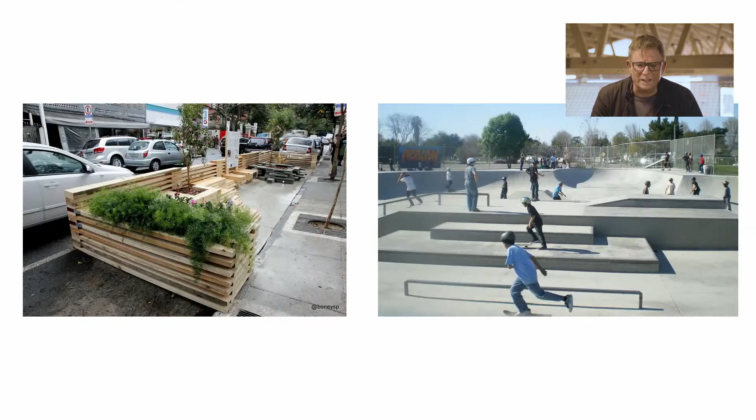Movements such as these, that in many ways can be considered a form of social activism, have ironically inspired many contemporary planned public spaces, such as skate parks and parklets. As you can see in the images, small interventions in the city are really critical to bring life. In a sense, I'm convinced this has been inspired by the more guerrilla efforts that people have in terms of doing it on their own. Cities embrace that and they bring solutions to the table as well.

Likewise, I'm also intrigued by some of the more top-down cultural institutional strategies when done well - spaces designed by artists that often blur that public-private divide. Here on the left is Chris Burden's Urban Light, a wonderful installation at LACMA. Frankly, it's the most important piece in that museum, but it's really for the people outside. And it's at the LA County Museum of Art.

Jessica Stockholder's Color Jam on the right is located in Chicago, where the artist quite literally created a 3D painting at a major city intersection. I'm inspired by artists, inspired by how they engage cities. So to me, that is part of the DNA of what we try to do, inspired by the people who are also embracing this idea of cultural evolution within cities. Chris and Jessica are doing that, and that's something that drives our work.

In our work, we likewise bring aspects of the public realm into our projects. This idea of borrowing space from the private domain is challenging, but we are committed to this principle, whether it be through small or large gestures. We believe that this brings value to the projects and benefits how people live.

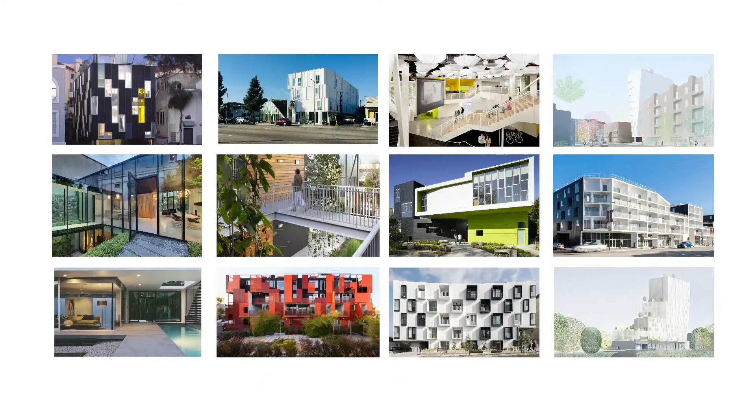All of our projects are designed with the same DNA and come in various scales, as you can see by these examples, from small to extra large projects. And they all house a diverse cross-section of people and places.

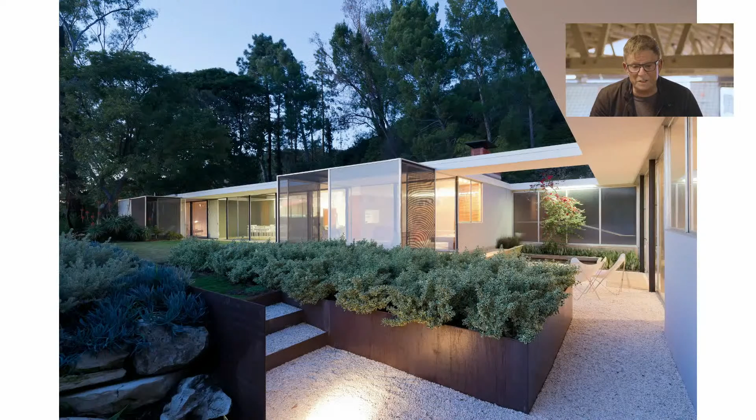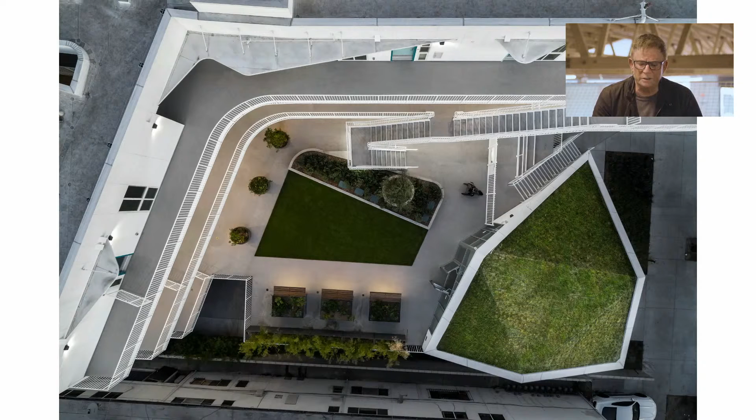Whether it be renovation of a historical architectural home, such as the Shulman house, which I will discuss shortly, or a housing project for the unhoused, which is our MLK 1101 project, or conceivably off-campus student housing along a busy commercial corridor, which is our Granville 1500 project, or a museum project, a small nonprofit project in Detroit, or conceivably a significant brand like Nike - each project is approached with the same core design principles in mind.

The first project I will discuss is our Shulman house renovation. This restoration and modernization effort applies contemporary measures of performance and design to a historical building to enhance its continued life as a family residence. That's critical to this project. This was not a museum artifact, it is a home. It was a home for Julius Shulman, and we were commissioned to design for a new family.

The Julius Shulman home and studio was originally commissioned by photographer Julius Shulman. It was designed by Raphael Soriano and completed in 1950. It's one of 12 built by Soriano, but only 2, I believe, remain. This is also the only one that's an all-steel frame, and it's a City of Los Angeles historical cultural monument.

So we were engaged to not simply restore the significant home, but to update the space so that it could meet the specific needs of a young family.

The home was inspired by the original case study houses, which were, in a sense, the testing ground for architectural ideas in Los Angeles in the 20th century. Soriano was not one of the case study architects, but he was inspired by it. He spent a number of years working with both Richard Neutra and Schindler, so his DNA was very consistent with what was going on here in Los Angeles during the time.

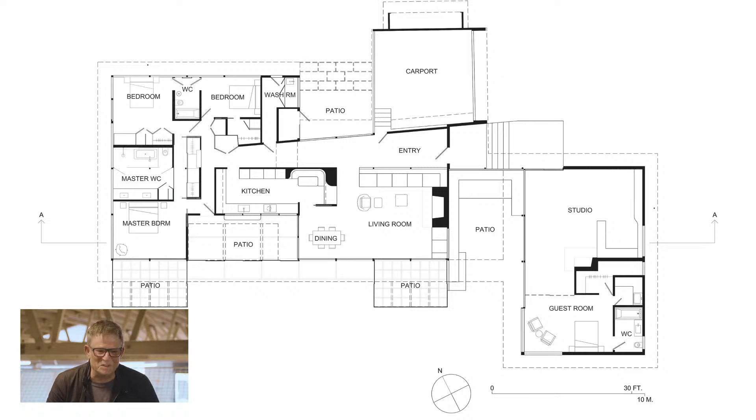Equally so in terms of how we wanted to handle the project. We wanted to recognize certain aspects we had to follow, but we were also able and open to the idea that we could upgrade the kitchens and bathrooms, which is appropriate for a family. That's what's interesting about projects here in Los Angeles - you have that opportunity if it's a home.

In this particular drawing, the darker green is what we had to protect and maintain - small components like the fireplace or other aspects. The lighter green is what we repaired or replaced in kind. The blue is what we were able to replace - you can see in the kitchen area, the middle area, we're able to replace that, which is important. And the yellowish green, we were able to alter. So a variety of different approaches throughout this whole design process.

Thus it had to be calibrated, and also working closely with the Office of Historical Resources, we had to do it right.

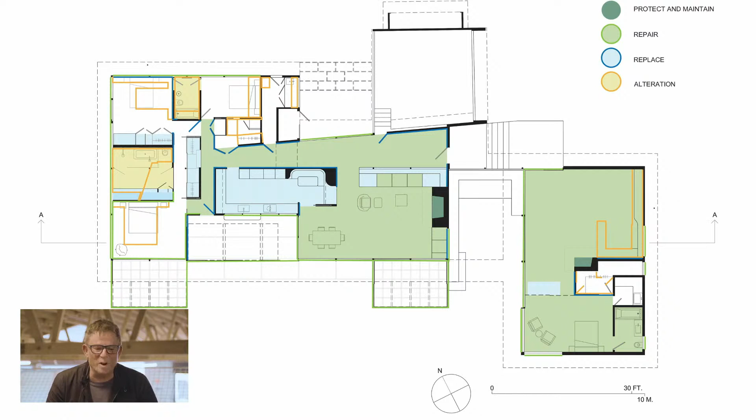One of the other key issues of the project was keeping with the indoor-outdoor California lifestyle popularly promoted in Julius Shulman's photographs, and that certainly was the case with this project. The original system of sequenced glass planes was restored and then paired with a parallel system of adjustable screening veils - that's something we brought to the table.

There was one issue with the house, which was that there was an ample amount of light that came in, but it was starting to fade the interiors and it was rather uncomfortable. So we added this layer to the whole project, which elevated the design, which I'm excited about. These transitional spaces created these screened-in patios.

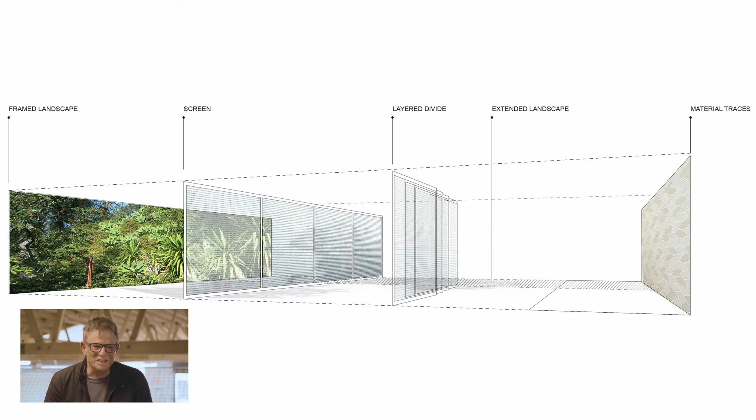And they were key to the project - we had to create comfortable spaces. So you'll see throughout the project, these screen ideas were infiltrated throughout the house to really play with the idea of muting the direct sunlight inside.

Here you can see the completed project, looking through the landscape. The landscape was done by Mia Lehrer, a local landscape architect here in Los Angeles. This is an idealized image. You can see the layers we were trying to create from the landscaping, filtering through these outdoor rooms, which were screened in, and carving out openings throughout the house. You can start to see the layers and components of the design, celebrating Soriano's solution.

Ultimately the owner, Shulman, won out, and the screens were put in so he could actually be outside. Needless to say, in Los Angeles—and certainly this may be the case in Australia too—there are mosquitoes and other varmints outside that try to infest your site. This was one way of mitigating that issue. A very interesting story behind the two of them, and Shulman won out in the end.

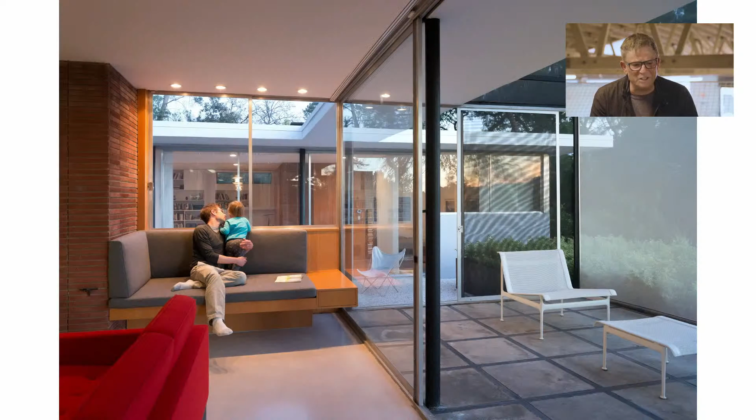Here you can see the palette of materials we were working with, including the existing fireplace. The cabinetry was a new component we brought to the table—custom cabinetry that we designed. The Office of Historic Resources was happy with that; they had no concerns. They wanted to make sure the project was a livable organism.

Here you can see Jonah, who's in the picture with his child. Beyond this image you can see his artist studio, a photography studio, and another detail of the living room. So in a sense, custom cabinetry was introduced to the project as new woodwork, and an integrated shelving system was also incorporated.

What was interesting was that there was existing structure and existing cabinetry, but we were able to reinterpret that for a more contemporary approach. That's fascinating to us, because I believe that's how one can handle these types of projects—you embrace the critical components and replace them in kind, but also have the opportunity to further the home into the 21st century.

Here's another view of the studio, very minimal. We did pour lightweight concrete to upgrade the space, and you can see beyond, the cabinetry where the books were, among other things. That was a space Shulman used, and now the new owner uses it as well.

Here you can certainly see the cork entry. Again, we replaced the cork in kind, a critical component, and we also incorporated a skylight because that area was somewhat dark. That skylight element, visible in the left-hand image, really brought a piece of architecture to the space that complemented it—it was a way of bringing in more light. A wonderful approach.

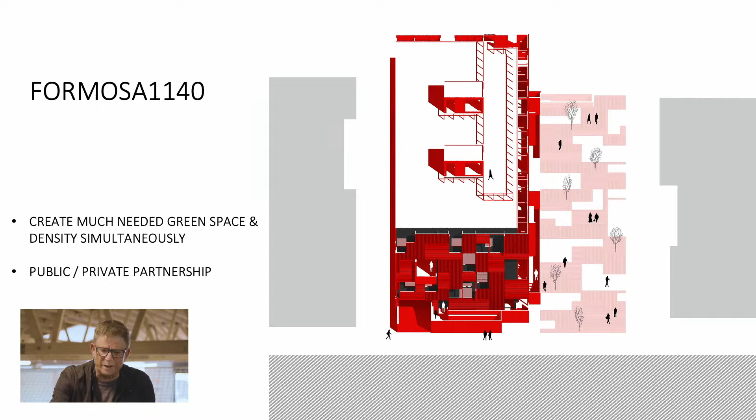Here's a couple of views of the existing site, where you can see that Formosa 1140 is located in the older part of West Hollywood, which was once filled with small craftsman homes and duplexes. The block has long since been transformed into a nearly unbroken wall of very generic 1970s stucco apartments. We wanted to really challenge that concept.

Our job was to design an 11-unit housing complex on the site of a derelict house. As you can see in this image, it was, in my opinion, a project that had no architectural significance. But during this particular time in West Hollywood, there was an enormous amount of development, and we got some pushback to try to save that house while still incorporating an 11-unit building on the site, which was fundamentally impossible.

So we took an alternative approach. As opposed to trying to keep the house, we wanted to go back to the city with an alternative strategy and see if they liked the idea. After months of back and forth between city officials, neighbors, our client, and our office, we proposed to demolish the house and replace it with 11-unit housing and a publicly accessible pocket park on the site.

What was very exciting is that the city liked the idea. This was one of the first pocket parks accessible to the public on private land. So this idea of blurred edges between the public domain and private domain is something that I think is essential to how cities could grow.

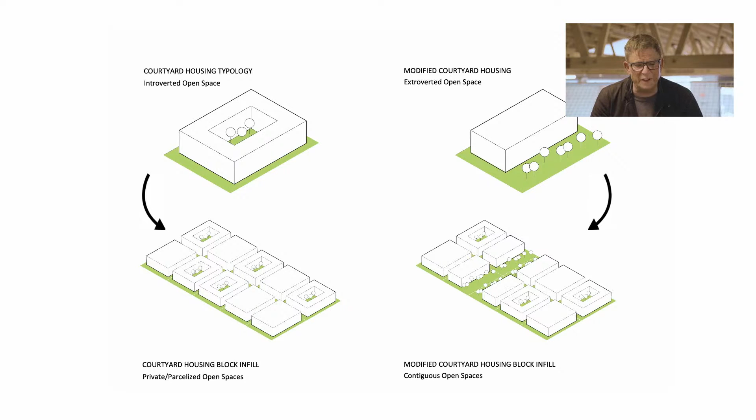This effectively bisected the parcel lengthwise, but provided a third, close to 4,600 square feet, for the residents, the neighbors, and the general public to share.

By eliminating this private courtyard, it also pushed the housing volume to the side, which allowed all the residential units to look out on the park, which is another wonderful component of it. As opposed to looking at an internalized courtyard, you can in effect be looking out at a pocket park. So your frontage is wonderful—a 45-foot by 100-foot space incorporated into this green space.

This is really critical, and this is the way we can make this unique public-private partnership work with cities. So can the city, in effect, lease the space from the client in perpetuity? That's what we did.

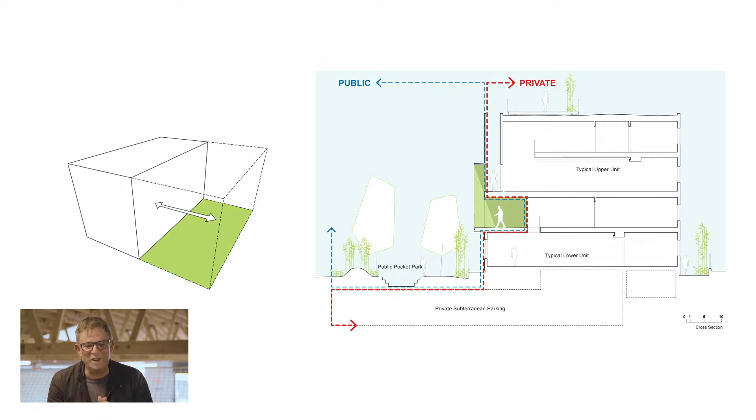It was a first for West Hollywood, meaning our client leased this private land to the city for $1 for 99 years. The city then paid for the park and will continue to upkeep it over the years.

A very interesting concept of architects working as strategists with cities and clients to create these opportunities for everybody. You can see in this drawing the section quality, with circulation on the third level.

You have the balconies at the second level, circulation on the third level accessing the units on top, and also accessing the first level from the park and the units below. So they're basically a series of townhouses, 11 total.

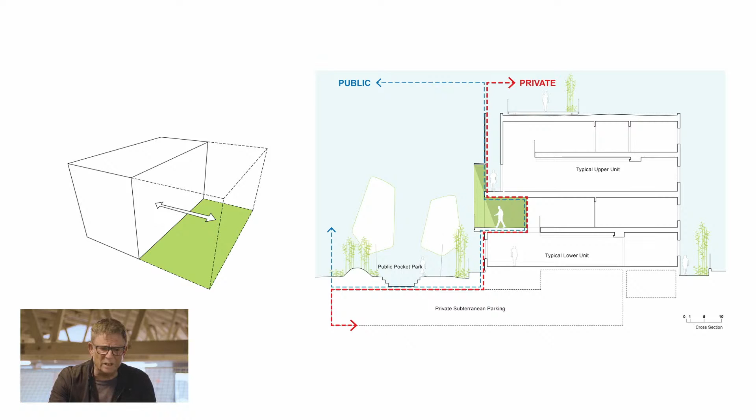There's a view of the project. The color and metal exterior created a strong contrast, as the neighborhood is dominated, as I mentioned, by these stucco boxes. This was an opportunity not only to look at aesthetics, but also at social agency.

I'm convinced that one has to do both. It's not simply enough to bring social agency to projects—you have to, as an architect, bring aesthetics, bring innovation, bring artistry to these projects.

So this design used a series of red and orange metal panels that not only provided shade to the units but also created apertures and openings for views. A very interesting way of choreographing a building.

The variety of privacy screens and balconies accomplished that. You have this wonderful experience inside where we're framing views, but we also placed perforated metal where we wanted to shade the units. This gives a very visual and visceral connection to the public park.

Coincidentally, the color of the Formosa Cafe, located down the street, inspired the strong palette for this project, which brings an interesting point about the idea of context. In Los Angeles, context is where you find it, so I chose to use color as context for this project.

Another side note: my dad, who was a film actor, frequented this Formosa Cafe with his colleagues Orson Welles, Marlon Brando, and John Houseman. In one sense, it was very close to my heart to design this project, literally a stone's throw from Formosa Cafe.

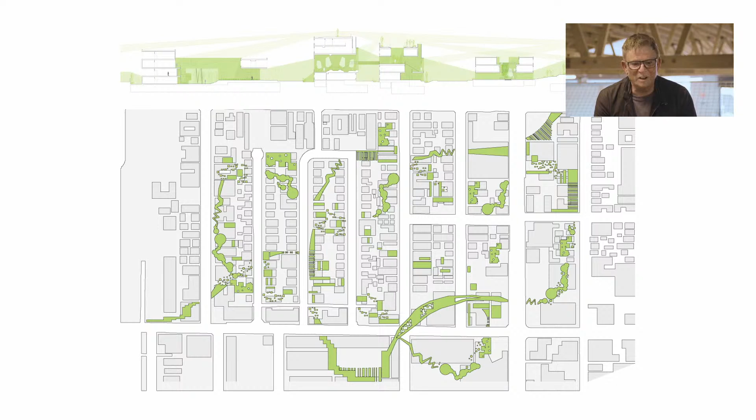So ultimately, we believe this is a model of finding opportunities where in a sense they did not exist in the past. It makes lively and engaging buildings into small parks. It all helps neighborhoods, that's the bottom line, and also brings people together.

Continuing this relationship between indoor and outdoor spaces, and in this case, challenging sites, I'm going to now discuss our SL 11024 project in Westwood. This project serves as a hinge building between two ecologies. It engages the UCLA campus as well as the larger Westwood community. Likewise, its design straddles two challenging environments: a historically sensitive building and demanding hillside topography.

So this project is fascinating in a sense. It's right across from the Neutra Strathmore Apartments, another historical landmark. Coincidentally, I got this project because I had done a previous project next to a Schindler project in West Hollywood, the Schindler House. So I landed this commission because they felt that there was a way that I, and collectively LOHA, could handle building next to historical landmarks.

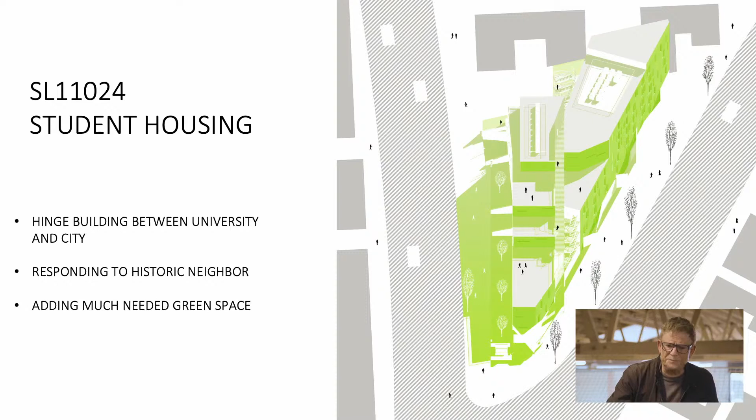So a critical issue here was that it was in Westwood, student housing, but also engaging the city. It's located in a very dense part of the city, Westwood, adjacent to UCLA, and right next to one of LA's historical treasures, another landmarked project by Richard Neutra called the Strathmore Apartments. There you can see the image of the project on the left, and you can see the Strathmore Apartments right next to it.

It may be difficult to see in the image on the left, but it's right next to the lower volume of our new building. Right at the north of that part of the building is where the Strathmore Apartments are. There's a site plan where you can begin to see our project, which is a very complex wedge-shaped site. It actually drops over 50 feet from one corner at Strathmore Apartments all the way down to Levering. There's a 50-foot drop, very complex and challenging site. And you can see the Strathmore Apartments shown in this site plan, across the street from it.

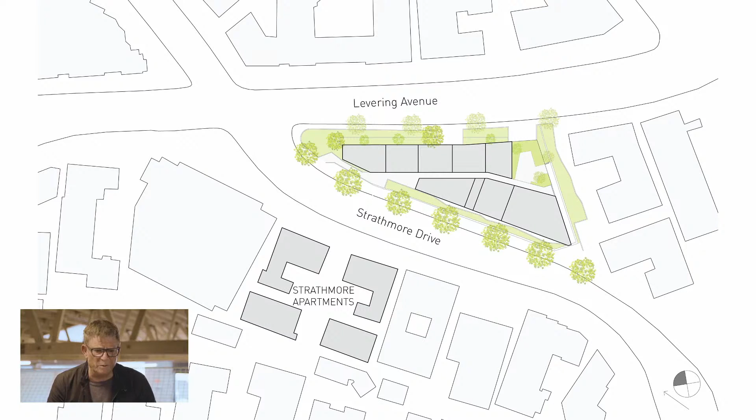So this was a very important project. Again, how to build next to a historical landmark played a big role. Our scheme did respond to all these constraints that were established by the neighborhood.

And you can see in these diagrams how do you deal with the complexity of a 50-foot drop in the site, and how do you deal with the complexity of the massing next to a historical landmark, which is only a 2-story structure. All these elements led to the stepped up massing, as you can see in these diagrams. So manipulating the building to respond accordingly, that was crucial.

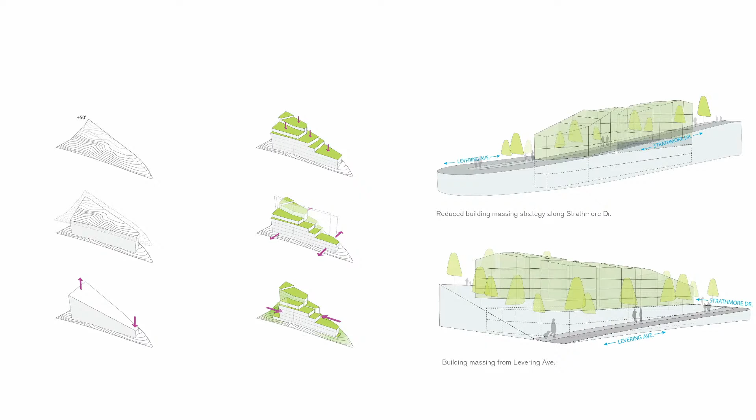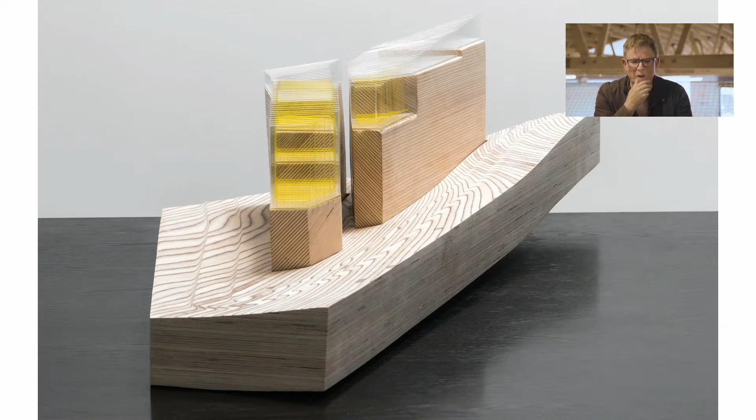We pushed the density of the building to where the larger buildings were. There's 6 to 7-story buildings on one end of the site, whereas the Strathmore Apartments was on the end where we dropped it to 2 stories. You can see this in these diagrams, and also in this model as well. The lower massing is connected to the Strathmore Apartments, whereas the density is pushed back where the larger buildings are.

And there's a view of the project completed. I'm really excited about this project. It was a very complex site, a very unique way of dealing with the city and how you stitch in these urban areas with these types of projects, but also push the artistry, push the aesthetics, while also recognizing the value of looking at how people engage each other.

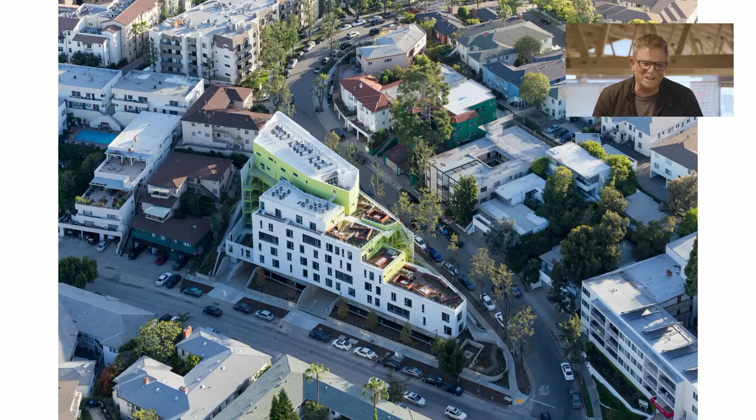That was critical. The stepped up massing afforded us the opportunity to have these outdoor spaces where people could conceivably connect with each other, whether it's students, or for that matter, there are a number of people in the building who are in the UCLA medical profession as well, doctors and nurses who live there. It's a very interesting hybridizing of two ecologies, the ecology of students and the ecology of just normal people who have jobs in the city. So hybridizing those two is very interesting.

And there's a view of the outdoor spaces. So again, this idea of outdoor spaces for residences throughout. There's vertical activated edges as well, because one can see down on the street. You can see from one level to the other how people can connect, and equally you can see the Strathmore Apartments in the distance, the white buildings. So there's a way of connecting not only in plan but also in section—that's critical to how you approach architecture. Think of it as being a living organism, how it connects not only in adjacencies but also in section.

And there's a detail of the facade. Our material choices for the building were, again, materials I'm very committed to—a metal exterior. This one was primarily aluminum because it was relatively close to the ocean, so to avoid rust we commissioned aluminum as an exterior material. That's what the white component is. All the cuts in the building, which return, you can see in the green colors—that was cement board. So it was a hybrid of two different materials. The perimeter was wrapped in white metal, and all the cuts were cement board, painted a chartreuse green, which is interesting because in the evening there's a light glow to it.

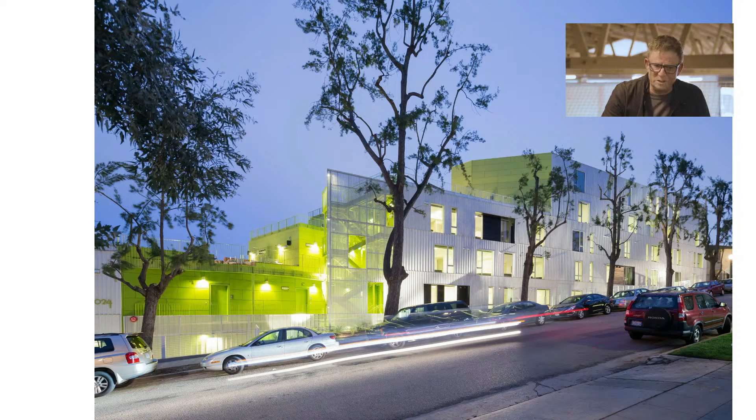So here you can see that image where you begin to see how the spaces inside have this wonderful kind of vibrancy to the cuts and the strategic voids throughout the buildings.

So now we're going to move away from Westwood to an area where there's a crippling reality of what we're dealing with in Los Angeles. There's an unprecedented housing crisis we all know about, and a massive inequity. There's a growing homeless population throughout the Southern California region, and we're dealing with it in Los Angeles. It's an everyday issue—when you drive around the city right now, you see it everywhere. We have to address this issue.

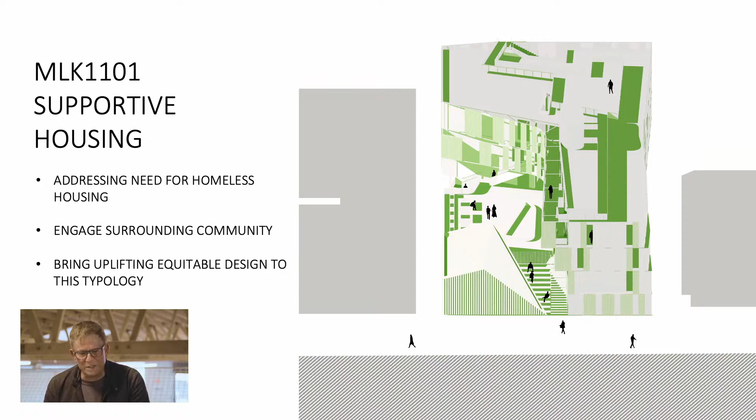Our practice is deeply embedded in this critical issue, trying to solve it. This project represents one effort to do that. It's a supportive housing project in South Los Angeles, where there's a need for critical housing. It addresses homelessness, engages the surrounding community, and brings equity in design to this typology. We are convinced that all good design has to be available to everybody—that's something that drives our work. We don't see a variation on that. We don't see supportive housing, or housing for the unhoused, as being less of a design commitment. We see design commitment on all levels, and this represents that.

Some background on the project: it's located in South Los Angeles, one of the city's poorest neighborhoods. 33% of its population has an income below the poverty line, and the college graduation rate is a meager 4%. This contrast is a lingering effect of redlining—the deliberate segregation of Black and other minorities, who were permitted to live but never to own property in homes they lived in. That's critical; they were never given that opportunity, and this represents a way of trying to challenge that. But even 50 years later, after those laws were made illegal, much of the racial and socioeconomic makeup of this area remains segregated. While individuals are no longer confined to communities based on race, racial boundaries still exist, defined by the disparity between the haves and have-nots.

That exists today—redlining exists today, but it's framed a different way, and that's something we're trying to tackle here. This phenomenon is hitting Los Angeles particularly hard. A growing homeless population, now close to 70,000 individuals, lives on the city streets. So at LOHA we feel a commitment to do work of consequence and contribute in the best way we can.

In 2014, we were approached by our client to design a 26-unit supportive housing complex on Martin Luther King Boulevard for formerly homeless veterans and chronically homeless families. The site was a vacant, unimproved lot right next to a McDonald's and a strip mall—a hodgepodge of low-rise apartment complexes on the street, but you can certainly see the wide streets and the dynamic of the space. It's wanting for something dynamic, wanting to provide pedestrian life, and that's what was lacking.

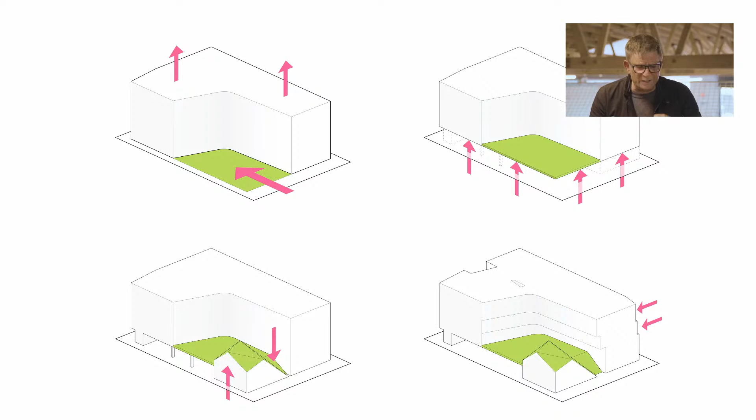So we lifted the building, thus you had this outdoor living room, which was above. We then folded it down to the street, so there was a visceral connection to the street, represented by the staircase that you'll see in these further images. There's the partie, or the axonometric of the project.

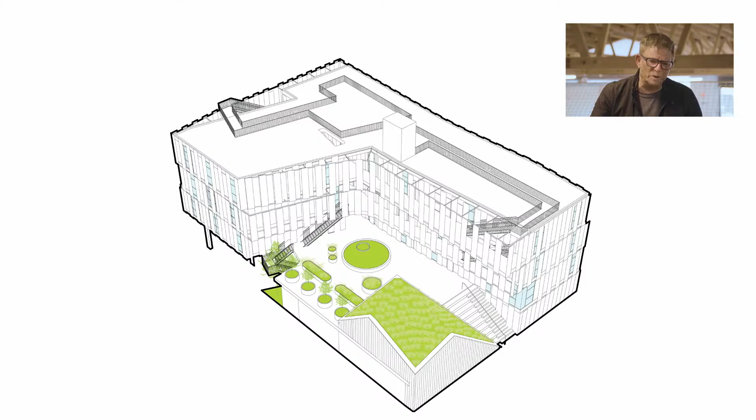An L-shaped building in terms of sustainable approach, which is very exciting. All the units are accessed from the exterior, so a very simple, very direct way of dealing with ecological issues. They can open the door, open a window on one side, open a window on the other, and you have cross ventilation. So it's a really nice quality of space and light, with light from a number of sources in these type of projects. That's something that drives a lot of our work. We want this opportunity to create passive design strategy with all our work.

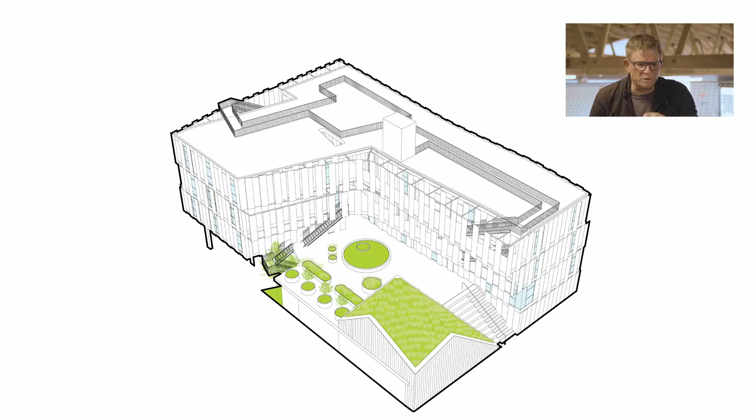So you can see the diagram, the L, the outdoor living room, and then the community room that we placed on the corner. That's critical as well. We do have retail on the street level, and there's a section you can see where, again, very important, each project we do has to have crucial sustainable approaches.

So each apartment is designed to receive sunlight and cross ventilation, reducing the need for heating, cooling, and artificial light. The project employs the latest strategies, environmental responses, forward-thinking green design to maximize space and benefit the entire community. The building was certified LEED Gold, which we're very excited about, and it features high efficiency heating and cooling, appliances and fixtures, solar water heating, electric vehicle charging, and bike parking. We're trying to encourage all these elements to be incorporated in the project, and that diagram starts to reflect all those components.

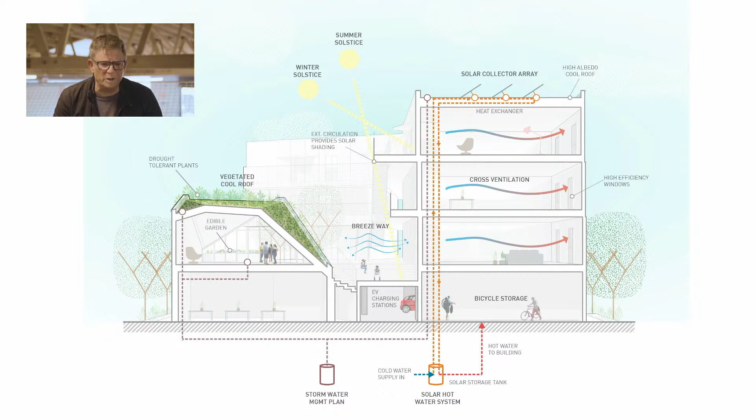We also, which is extremely important, have a green roof that folds down to the street, as you can see, over the community room. So bringing landscape is critical to this project and plays a big role. And there's a view from the street.

We pushed the density next to the McDonald's, which is not essential but helps respond accordingly to McDonald's. So the nature and the adjacencies of the buildings played a big role in terms of the overall design, responding to the context of where it is.

Again, these retail units are interesting because they will generate income to help subsidize the housing while providing workforce training. So these spaces are going to benefit not only the building, but also provide job training, which I think is critical to this, and it's also important for them so they can transition back into society.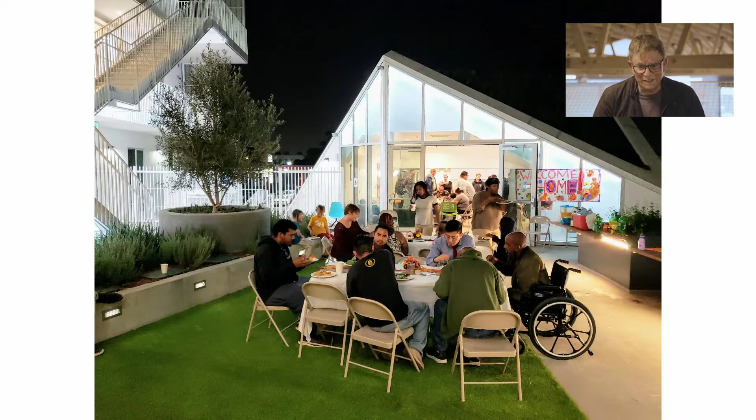And it goes to show you, you can actually bring great design to all socioeconomic levels. And this is a great image where this was literally when the tenants had just moved in, which was a Thanksgiving dinner. This happened before the pandemic, of course, but it was very exciting because they all moved in 3 days before Thanksgiving. So this Thanksgiving dinner happened right when they all moved into the building. It's very exciting to be there.

Again, furthering the need for homeless housing to be built faster and less expensive. This next project is celebrating that. It's called Isla Intersections and Annenberg Paseo.

As I inferred earlier, LA needs 568,000 new units. We have so many people on the street. We need to provide new units for affordable housing. That's one of the most critical things in Los Angeles, and we're going to need to provide that in the next coming decade. So with that in mind, the city needs to build homes quickly and inexpensively. That's critical to this project.

It's situated once again in South Los Angeles, in a very unusual site. It's actually several city-owned parcels made available for affordable housing developers. This is one of 1,700 properties that the city owns. And with regards to these very complex, challenging sites, the city is now bringing these to the table for nonprofit developers to provide affordable housing.

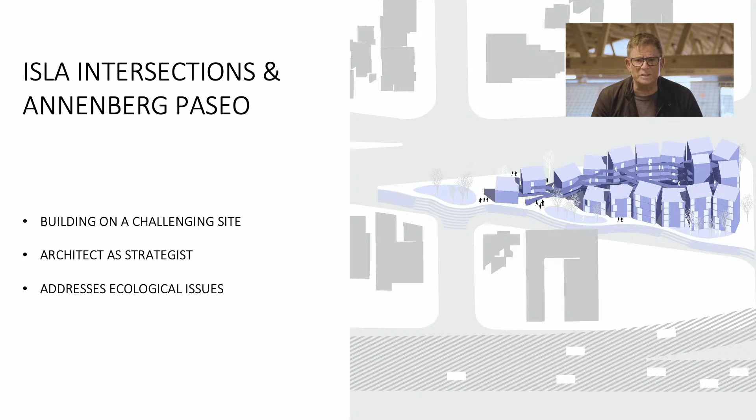Context image, and you can see the wedge-shaped, triangular-shaped site in the front there. Behind, you can see these very busy freeways. That is actually the busiest freeway interchange in the world - it's the 110 and 105 freeway.

And so you can see the challenge of these sites that the city owns. This is the last remnants of land that they have available in the city, and they're trying to find solutions in these challenging sites to provide spaces and places where people can live. But one needs to also tackle the issues of toxins and the issues of building next to the freeway. That's the challenge we had to address.

So with that in mind, we designed a 35,000 square foot building. It's a 54-unit housing project, and it's adjacent to the Paseo that we also designed, which is very exciting - that is a very important component as well. We provided a green lung to be able to mitigate the toxins and the noise from the freeways.

It did offer also the opportunity to work with container construction. So you can see on the left-hand side, these are the containers that were fabricated in a factory, while, as you can see on the right-hand side, we were doing the foundations on the site. This was really important because we shaved off one year from the total construction time on this whole project.

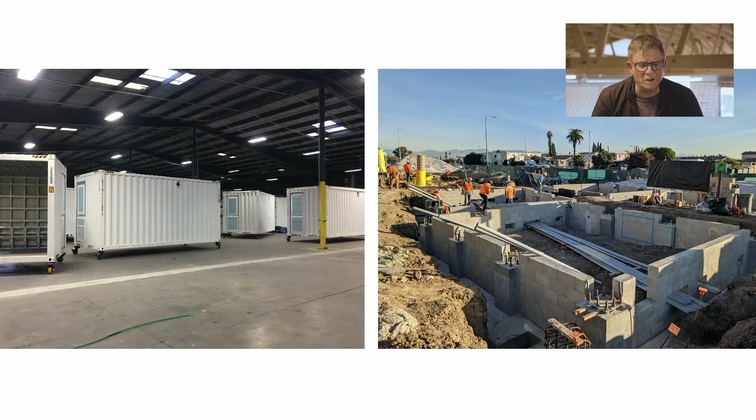Just to show you the timeline: from the time we started the project, once we got approvals and permits, we started working on the site utilities. At the same time, we were fabricating the units in a factory. As we know, the conventional way of building is you do all the site work, site utilities, foundations, and then build on top of it. What we were able to do is build all the units in a factory at the same time we were doing the site work, which saved us close to a year.

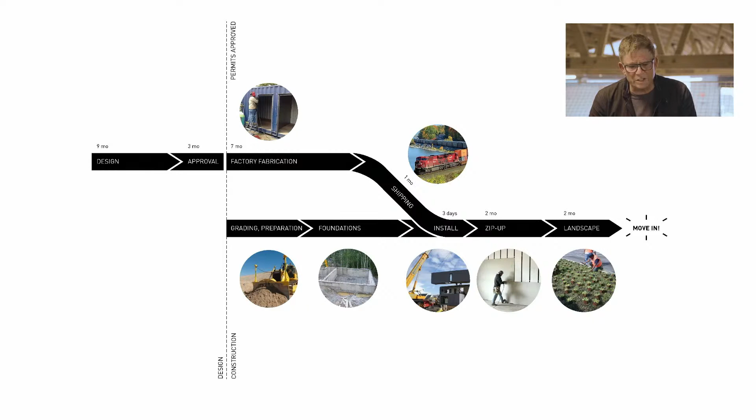And there's the site plan. It's organized along the spine of this street called Broadway, and it's a series of 16 staggered towers, for want of a better word. They go from 7 stories down to 2 stories. You can see in the plan that the uniqueness of the geometry played a big role as well.

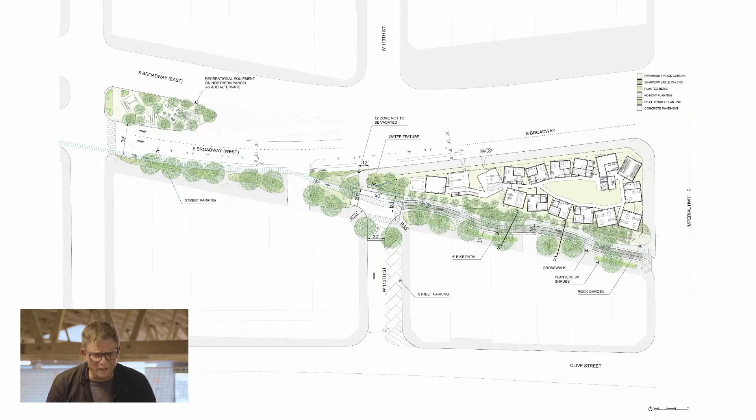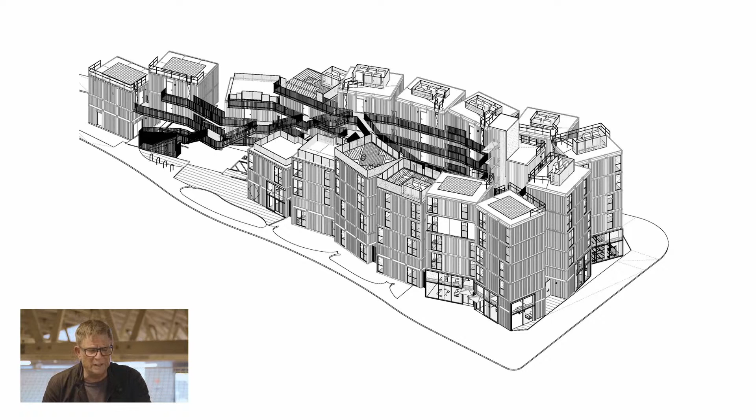And there's an axonometric, more of a diagram of the units. Greater density was critical—we had to provide as many units as possible. They're all stacked around this very unique wedge-shaped site, but connected by a series of walkways in the middle areas. So circulation in the center, and all the units wrapping around the perimeter.

One of the key ideas of the project was we didn't want to create a flat, simple geometry. By shifting the geometries of each of the quote-unquote towers, the sound and nature of noise from the freeway is mitigated somewhat by the geometry. You don't want a flat surface, so we calibrated this with consultants to find the most optimum way of designing the project to address that issue.

Here's an axonometric of the project, and next to it, which is exciting, you can see the Paseo. We actually vacated this one street called Athens Way and made it more pedestrian friendly and bike friendly. This is one of the first shared streets in Los Angeles.

As you know, there's a car culture in this city, and the crucial thing to this project is that we wanted to mitigate that, to address it, to challenge it, and provide spaces for people to walk and ride bikes. That's essential to the city right now, and it's going in the right direction. This approach to the city is being embraced by a number of people, and certainly the city is opening up this opportunity.

Shared streets get away from cars and provide gardens and a variety of programs. This particular Paseo that we're designing, along with the housing, provides for a farmers market. There's a small lab for startup testing, the making and selling of goods, programs to promote healthy eating, fitness, and job training. So all the programming of the adjacent housing on the first level is job training and amenities, which are critical to getting the unhoused open to moving to the next step in engaging society.

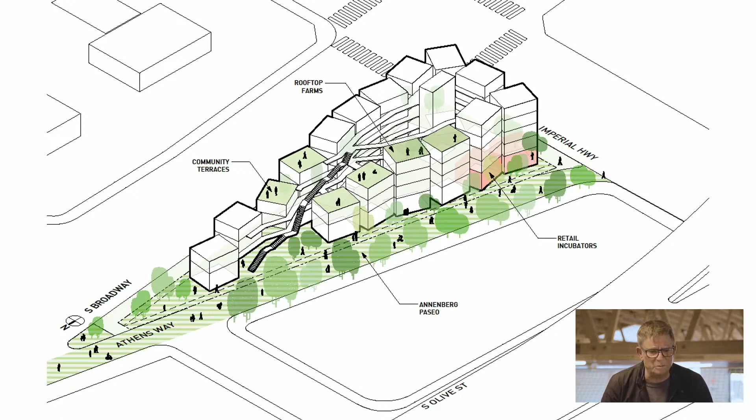And there's a view of the project, and again the context of this carpet of development—low, but very dense. It's interesting, this whole project.

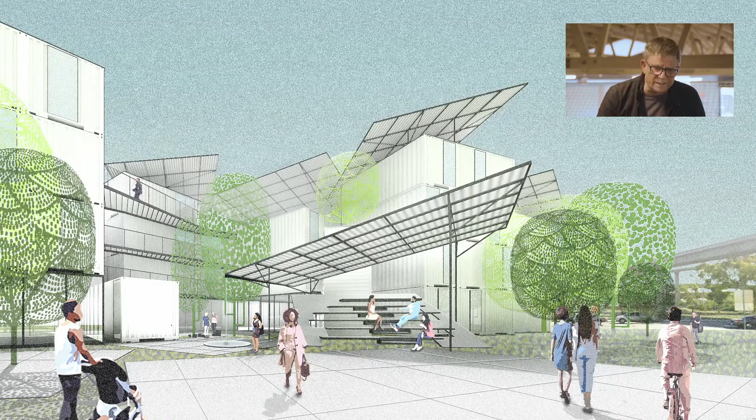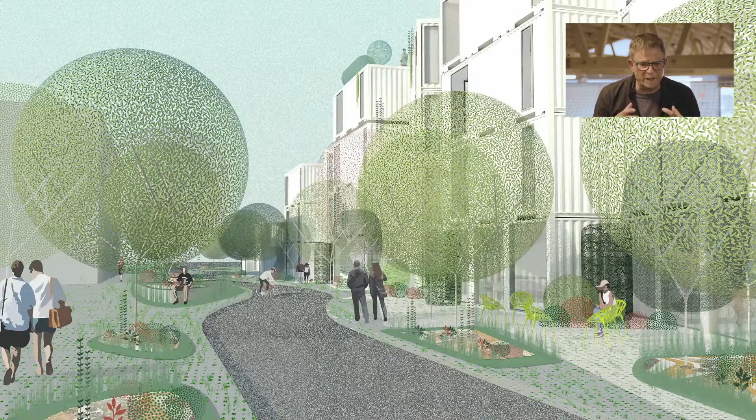We've also been asked how we feel about providing housing next to a freeway. Well, frankly, these sites are the last remnants available within the city, so we see this as a case study for how we can do this—that's critical to the solution. Not only are we creating this green lung to mitigate and absorb toxins from the freeway through the Athens Way shared street, we're also providing multiple sustainable solutions, including solar power and water capture devices such as gray water systems. We're trying to bring all these aspects to the project so it is a living organism, one that embraces a good place to live.

And here you can see the Paseo that we're designing. That was once a street, but now it's going to be much more democratic towards pedestrians and bikes. This will, in fact, have a Greenway with a marketplace.

And that's critical. The other issue is these trees that are just conceptually drawn here. We are going to be planting, working with consultants, the right trees that absorb site-specific pollutants, trees and bushes that have the ability to clean the air. So that's very critical to this. You have to pick the right landscaping to accomplish this.

So the shrubs and the vines and the trees are all very specific to this site to absorb the toxins from the freeways. It also becomes part of a larger network of urban farms in the area, and the mission we're trying to achieve is preserving the tradition of South Los Angeles, which is bringing more produce to what many consider a food desert. There's very few opportunities for healthy food in this area. So we see this as a great opportunity to do that.

So the Paseo brings equity to people, bike riders, and car culture at the same time. And that's an important step for Los Angeles.

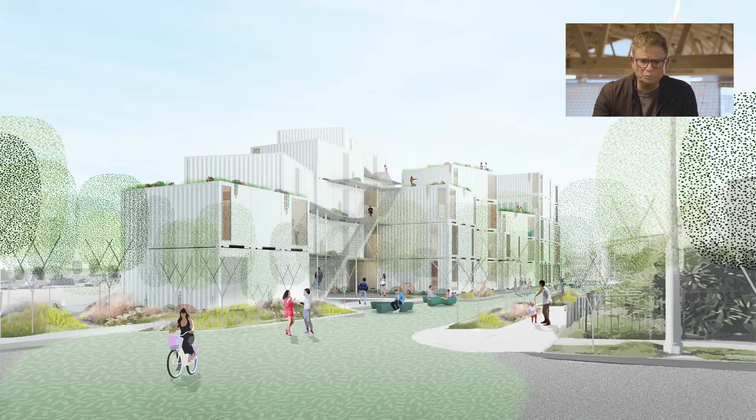Just another view of the project of the Paseo. You can see on the street level in this rendering, we will have a number of storefront spaces, and they will be training and support services and administrative offices, engaging the ground plane.

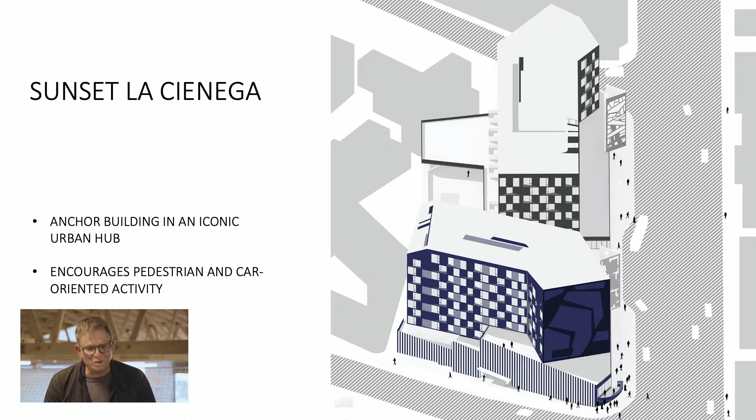Another project we've done, which is a jump in scale, is in Sunset La Cienega. It's a project that engages one of the most robust neighborhoods in Los Angeles, Sunset Boulevard. It's a very important, prominent intersection in the LA region, Sunset Strip at La Cienega, so it's the heart of the iconic Sunset Strip. What we're trying to do is create a vibrant new hub of urban activity in this area, which right now does not have that.

A little of the history here: the project is located at the corner of Sunset and La Cienega. It's a winding hill-type road synonymous with cruising, for want of a better word. The strip is lined with giant billboards, bars, restaurants, and iconic music clubs, such as Whisky a Go Go and the Viper Room. So you can see the energy that exists.

So we wanted to build on that and embrace it. Primarily, the design is to create view corridors through it, strategic cuts in the building, so that as opposed to a very conventional building, we've created this view corridor through the building so you can see the city beyond. And that was very important.

So these are early studies that we're looking at. It was designed as a public plaza with buildings that bisect the two buildings. And there's the building itself.

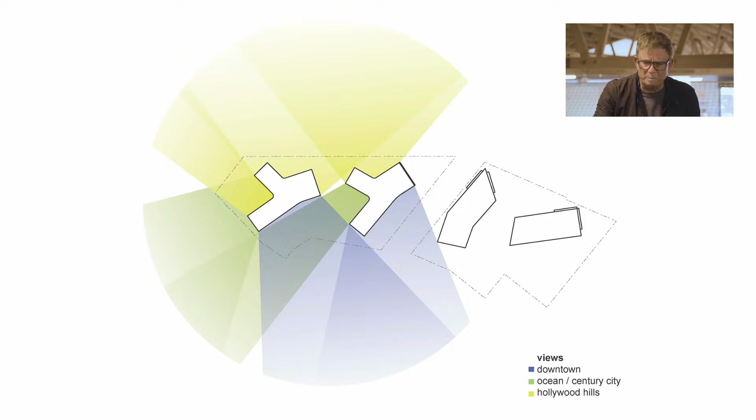But the patterning of this building played a very important role in choreographing the building. The facade of the two towers are finished in solid patterns of smooth trowel plaster, one steel blue and the other gunpowder gray. Two different buildings, but very simple, very direct, very principled buildings. And that was our approach.

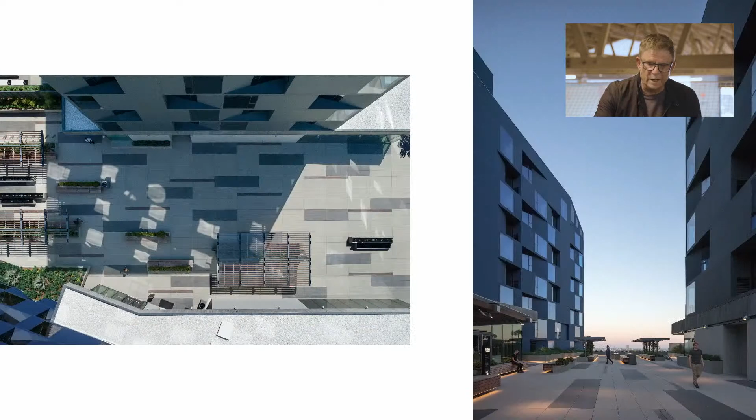Here's two other images of the completed project. You can see on the right-hand side the view corridor I was referring to, accessible to the public between the two buildings. You can also see the dynamic patterning of the windows.

Interestingly, not only was the pattern of the building reflected, it was also incorporated or folded into the landscape strategy as well. So the windows are, in a sense, a waffle pattern, a kind of shifted patterning in the building, which played a big role, in my opinion. We also folded back the windows 48 inches, so you have this very strong kind of patterning or choreographed spaces on the building.

So there's an example of it right there, where you begin to see how the building's facade can elevate the quality that one normally sees. What's also interesting is that we had to provide mechanical units per unit, but by folding back the actual windows, it provided an opportunity to put the unit hidden away. And that's something you can't see in this building right now — you actually don't see the units because they're tucked in where that fold is.

You can see the patterning and the quality of the design, which elevated the overall solution. This is a total of 190 units in the building, and there's a quality that image shows the context of the building on La Cienega. And a view of the lobby.

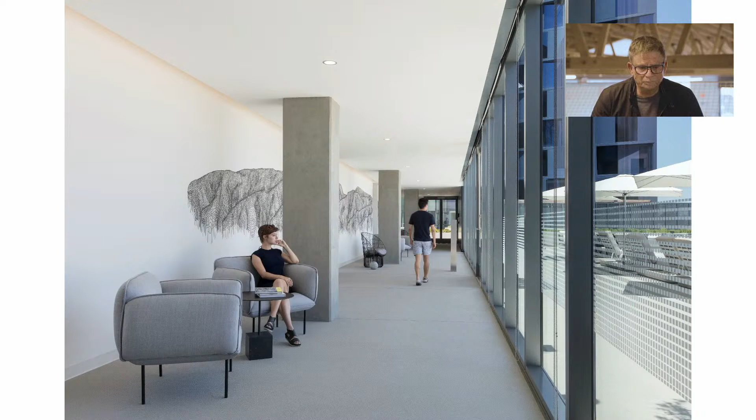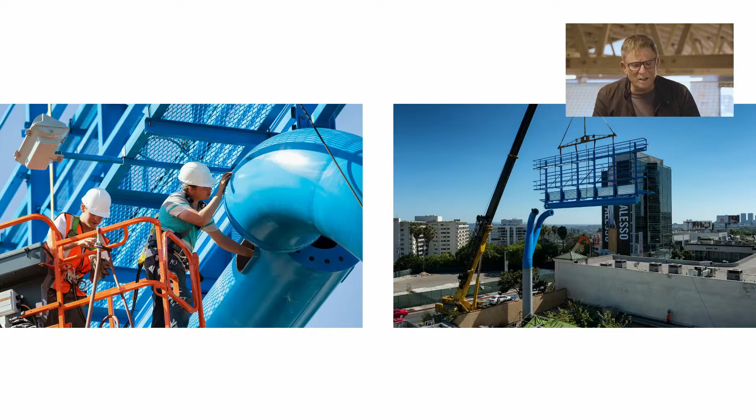The classic image is Sunset Boulevard with the billboards. You can see on the buildings that we designed, we were also required to provide these billboards, and that was a critical issue for the developer in terms of getting a return. So we had to design around these very large billboard structures, as you can see on the left-hand side. Not only did we do that, but we also built some billboards right across the street. We were approached by the city of West Hollywood to actually design a series of billboards throughout West Hollywood.

What was interesting was that they took the approach that small infrastructural components like bus stops and billboards were never really looked at from a design standpoint, the structure supporting the advertisement. So we embraced this concept and brought that level of design to these small infrastructural components.

Fittingly, our first one was right across the street from the Sunset La Cienega project. You can see on the right-hand side, as we're building the billboard, right across the street is a big hole where our Sunset La Cienega project was. That particular area of Sunset Boulevard became close to our heart - we were doing billboards and, of course, the Sunset La Cienega project.

In a sense, these projects and the billboard structures were thought of as an interpretation of: can you bring the visual culture of advertisement, but also bring it into the structure itself? That's awfully important - that did not exist before.

There's a view of the billboard design we did - in a sense, it's a wishbone concept, positioned so that the sight lines were mitigated for drivers moving east and west along Sunset Boulevard. A very interesting project for us to handle as an architect, to do billboard structures, which I quite like.

It's nice to be able to do different design strategies. We also were commissioned to do two other ones. One was a very important one - a billboard structure at the Rainbow Room. You can see on the left-hand side, this was a very, very famous club. So we had to incorporate the sign for the club.

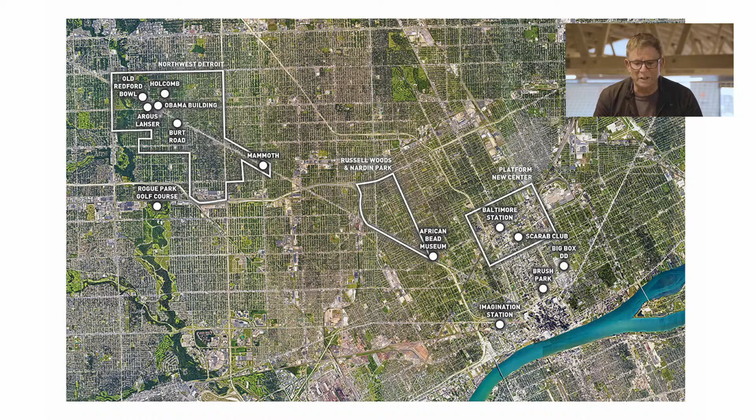Detroit, we're faced with a very different condition. In a sense, it's an inverted figure-ground relationship of a dramatically underdeveloped neighborhood fabric, meaning when you build in Detroit, you're building to the future.

You're building next to fields. You have to, in a sense, design it in such a way that someday those lots around it will actually be developed. So that was a fascinating step we took, and to really understand Detroit, to really begin to rethink that convention of how one builds in Detroit, and not simply bring Los Angeles to Detroit, but actually embrace the context and culture of Detroit and build for that.

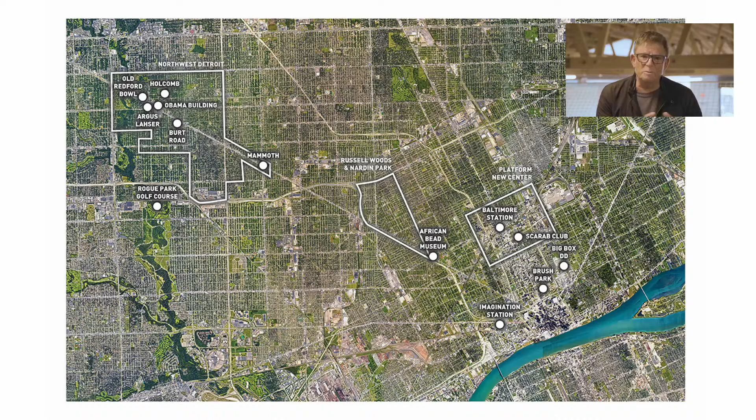Our Detroit projects are all rooted in a larger civic strategy. Detroit's gone through enormous downturn, enormous challenges financially. And when you work in Detroit, you have to recognize that when you're working with a developer or a client, their resources are limited. So you have to design keeping that in mind. That's what our challenge was, and that's what we wanted to embrace. How can we bring quality design, architecture, with a capital A, to a city that doesn't see much of it?

That's, at this point, needless to say, when Detroit was in its heyday, during the car culture and automotive culture, it was in a much better place. So now, in a sense, it's not about the old school approach, which was about Chrysler and Ford and about those type of industry. It's a very different culture. It's a very different place right now. They don't play such a larger role.

Our opinion was, and collectively, our opinion and the planning department of Detroit was to really embrace the neighborhoods, African American communities, and bring urban renewal to that area. That is critical. In the past, one has always brought, in a sense, urban renewal to downtown Detroit and use a trickle-down effect to be able to hit the neighborhoods. We took the inversion of that. We turned that idea inside out. We actually went into the neighborhoods and designed projects that brought, in a sense, a vibrancy to those areas. And that has been working with regards to Detroit right now. So we're very excited about the last 5 years we've been working there.

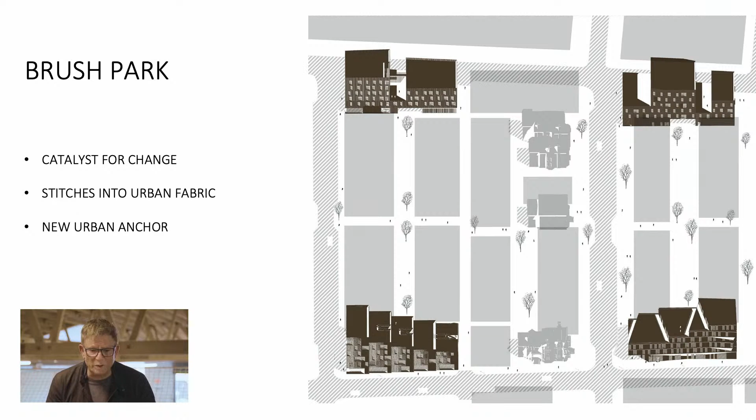You can see in the image on the right-hand side, those are the 4 corner buildings we were designing for Bedrock and Dan Gilbert. So now what's exciting is that we started this 5 years ago, and it's a very ambitious new residential commercial project. And in a sense, kudos to Dan Gilbert and Bedrock, because he made a commitment to go back to Detroit and actually embrace it and bring urban renewal. So to his credit as a developer, that was very important. I think he bought close to 90 properties, and this is the most important one that he bought. So we're honored to be participating in this process.

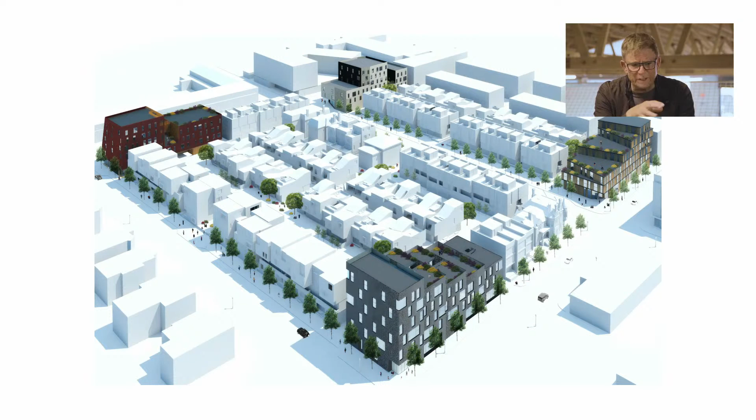We also had to embrace this idea that there was old and new. There are 4 critical historic Victorian houses that was actually on the site. So we had to stitch the new buildings and recognize the importance of the Victorian houses. Also, there was retail and a variety of other type of housing, not only with the larger apartment buildings, but there were duplexes and townhouses that were designed as well.

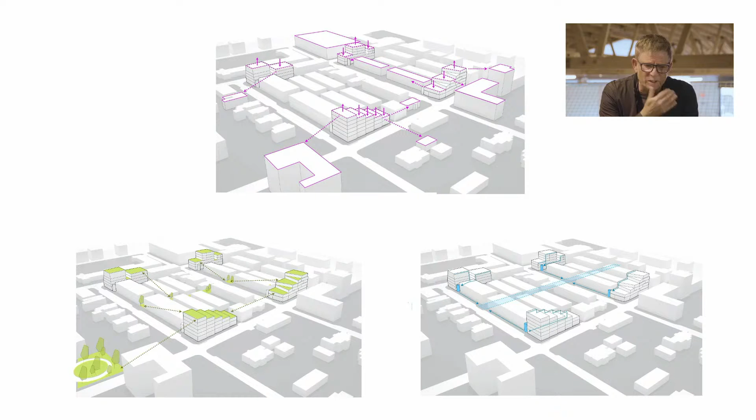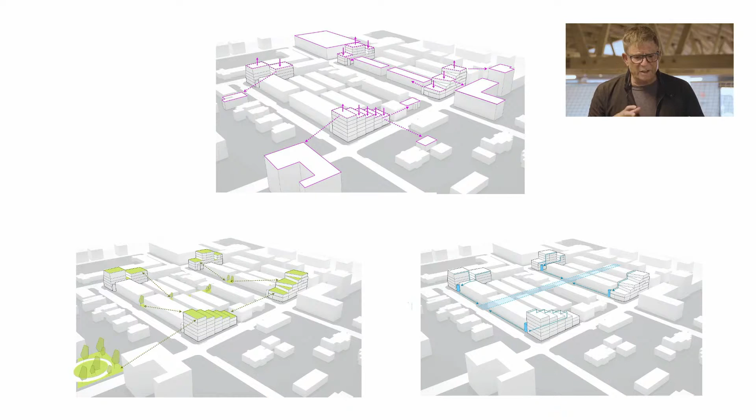So our challenge was to address the corner. And there's a series of diagrams and drawings that we did to really bring those aspects to it. One was looking at how can we bring an idea of green space to the central area? How can we create an opportunity? So if we can design the buildings, can we create a step massing for the buildings? So we create rooftop gardens that visually connect to this smaller scale. That was awfully important.

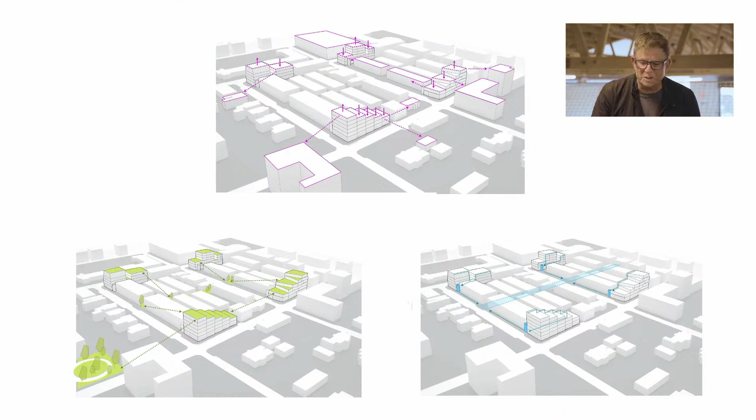So all the buildings were pushed down in certain areas so that it responded accordingly to the context of adjacent buildings, including historical Victorian houses, as you'll see. That was a critical component. Each of the buildings we did was really addressing the issue of adjacencies.

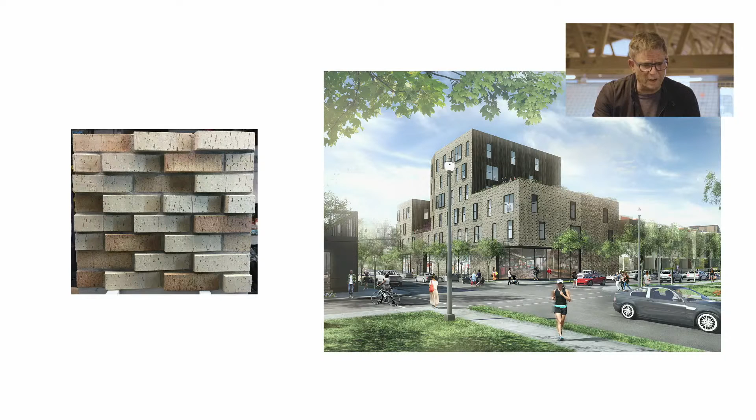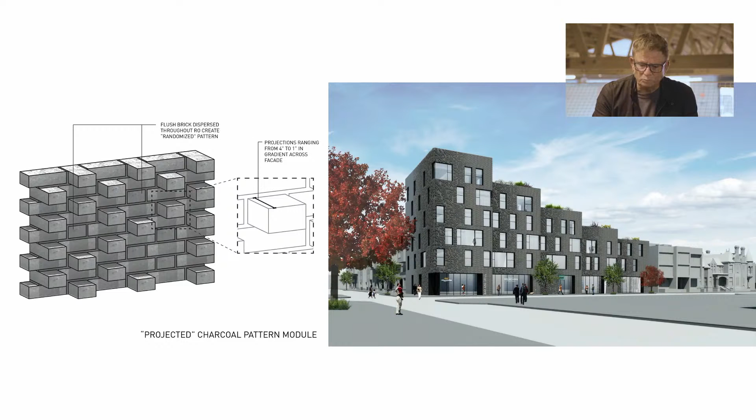These projects are really serving as an incredible anchor for this neighborhood hub. Our second project is a brick building. Each of the 4 corner buildings is housing 36 units. This one is also under construction. There's a shot of it right there - our brick building is actually under construction right now.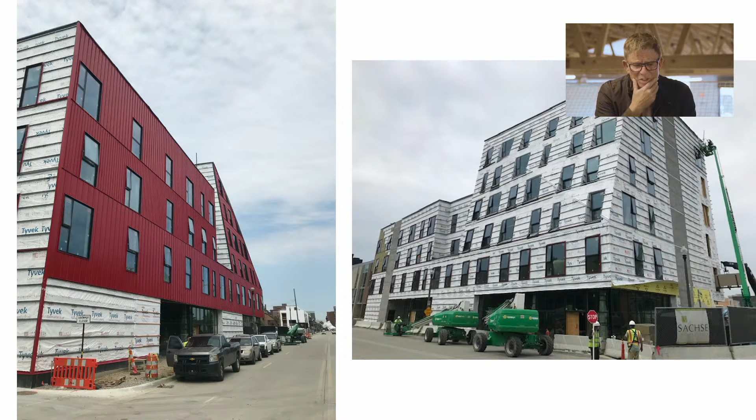The third one is a metal building, also a 36 unit building. As I said, the third building is a metal building. Again, each one is somewhat unique.

Very important - when they first approached us to do this, they wanted us to come up with 2 designs and actually copy each corner. I argued that's not appropriate, that it should respond to where it is on that particular larger development. And they embraced that idea and allowed us the opportunity to design each building.

So again, combining old and new, trying to foster social diversity and equity in the area. A number of these units are affordable, or at least affordable within a certain level. It's not affordable housing, but it's affordable to the community where it is. So we had to design very efficiently to be able to make that work.

There's a number of images - our first of 4 buildings that are completed. As you can see, all the others are at different levels of completion. And then you start to see the context. Another architect did the building on the right-hand side, so we had to design knowing what was coming at the same time.